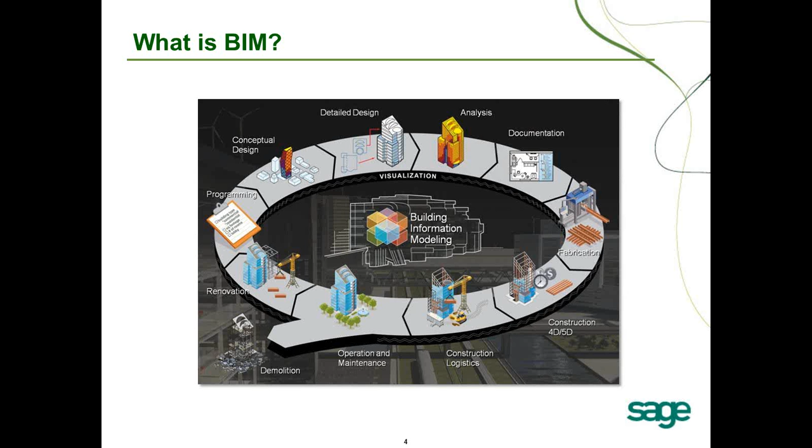And so that's this slide here. And by the way, the last slide that I'm going to show has all kinds of links, and Rob is more than welcome to send this out to everybody that attended today. So it's not just about Sage Timberline, there's all kinds of information you can go into with website links like Synchro or Navis and so forth. So that's what this slide talks about.

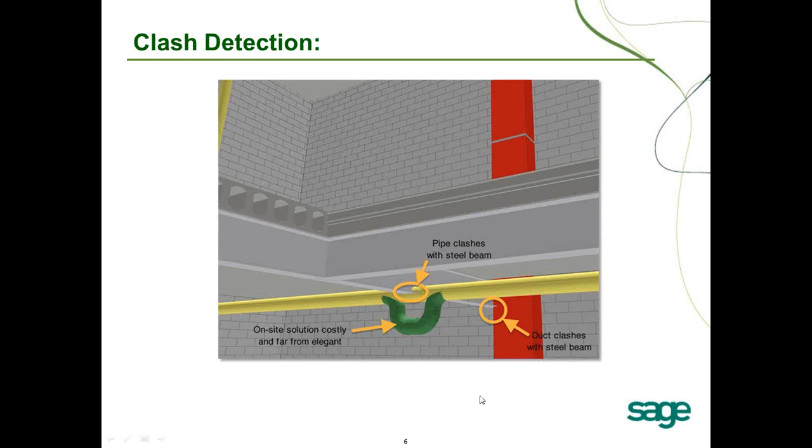Here's a couple slides. You have energy analysis as an example, clash detection here, where it's showing different scenarios, where you have to rerun the pipe where you've got a conflict. This is the application Synchro, which ties your Primavera, as I mentioned, to your model objects, and you're able to see your project being built in front of you. And again, with this application, if you put some cost to it, you can actually cash flow visually.

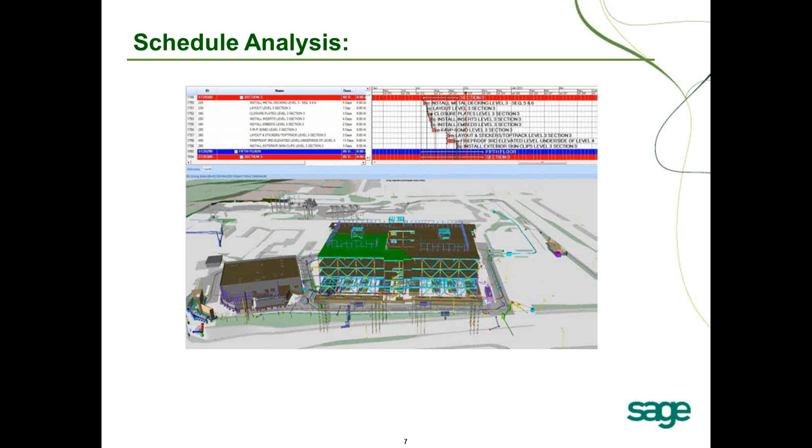And so that's kind of the basics of what is BIM.

Now, as we dive into how Sage Estimating or Timberline Estimating leverages from this, before I go into the BIM applications that drive our Sage Timberline spreadsheet, I'm actually going to talk a little bit about the core estimating and show a couple things within the core so you get an appreciation.

The way we work with BIM technology really mirrors the way our estimating application is set up. What I mean is Sage Timberline is a database spreadsheet application, and that database starts out as a book of information. You might have some pricing in there, the cost of a door. You might have an assembly that says I want all the pieces and parts that make up that wall, from the drywall to the metal studs to the insulation and paint. We have tools in there that also allow you to say how big, how tall, how many stories is this building, and as we answer those questions, it drives all that.

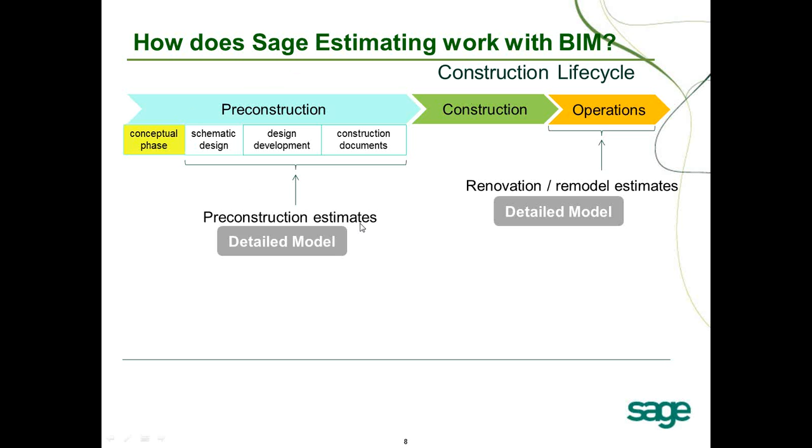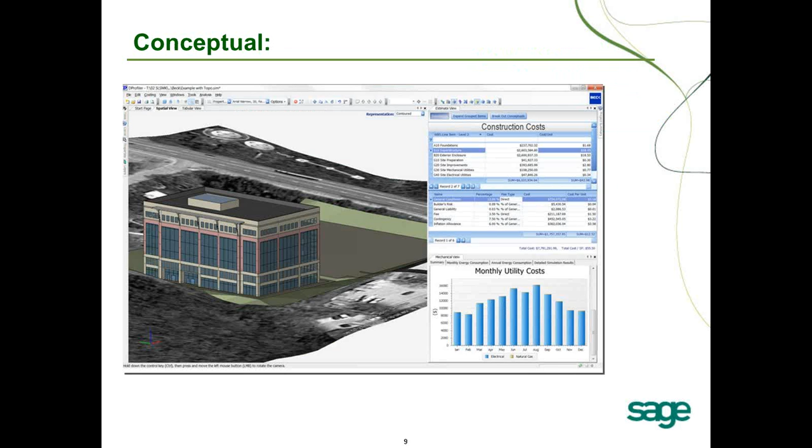So when you look at this area here in these four segments, that really is how we work within the core estimating application regardless of BIM technology. There's a slide of the dProfiler application I'm going to show here in a minute, and a slide of the Innovaya, which is working more with the detailed Revit information.

And people ask, what's the benefits? I've had the luxury and kind of got lucky here on some of these consulting jobs where I've been able to dive in and work with the BIM technology.

I think the biggest thing here is it gives companies another tool to utilize. Like the project I was on, it didn't stop us from looking at the drawings and being able to put in some other things to supplement, because BIM is a lot like a set of drawings. It's not necessarily going to be everything that's being designed in there, but you can certainly leverage from the good things that are in the Revit model.

On the project I was on, we had some really good information on structural and a lot of good things on a lot of the architectural trades, and we were able to leverage from that. But I think the biggest thing I'm finding out there is that it's really forging a great relationship with the architects, where you're really trying to communicate back.

And I've got a customer of mine that said they've taken the process from 2 weeks to produce a set of drawings down to 3 days.

And really what it's also done is, as I mentioned, it's forged that relationship with the architect. The architect, when they move on to another project, maybe a similar product, they want to be able to continue to work with them, almost creates that design-build relationship, working directly with that architect. It's kind of their job to lose, so to speak. So we're finding a lot of that going on.

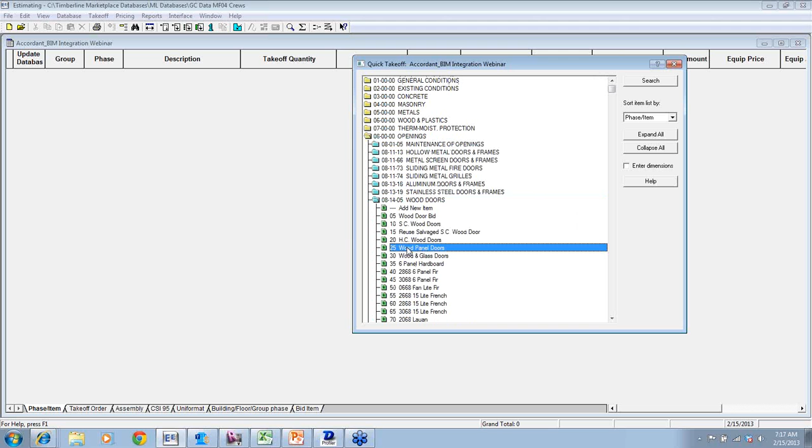So I use the door example. If I go into openings and go down to wood doors and I want to say a wood panel door, I can just drag that in. Again, I'm not doing anything with BIM right now. I just want you to get the understanding that it all starts out with kind of a book of information.

This database is completely definable, modifiable, unlimited in length. I've got a customer of mine that has over 1 million lines in their database. Not saying that's going to be your database, but the concept here is being able to build this book the way a company wants. It could be built on CSI 95, could be on 2004 Uniformat, or completely customizable.

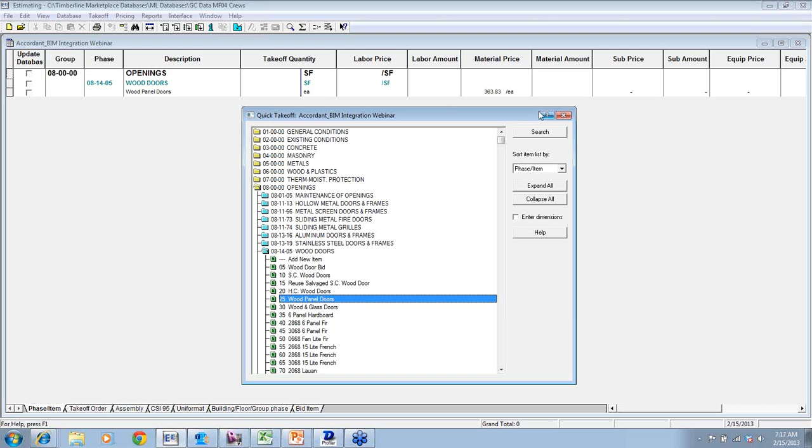The whole concept is as I drag stuff in, we can quantify things, and if you go over here and say, I disagree with that price, I want to make that $700, or make this $1,500, it back calculates. I can override things, and again, I'm working in a database spreadsheet concept.

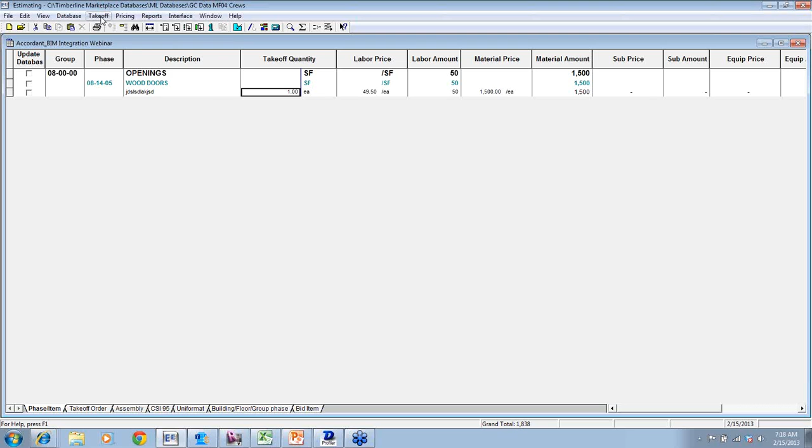Now, I mentioned to you earlier there's different ways to get information out of the database and into the spreadsheet. They're just roads that drive the spreadsheet, and if you look here in between these lines, there's different ways to pull that data and drive the spreadsheet. We have items, assemblies, and models.

So if you look at the assembly, let's say we're dealing with an assembly like a wall, or even a door assembly could be things. So if I go in here to a wall and I open this up, you see there's questions here. Again, everything you're seeing is definable, modifiable, unlimited length.

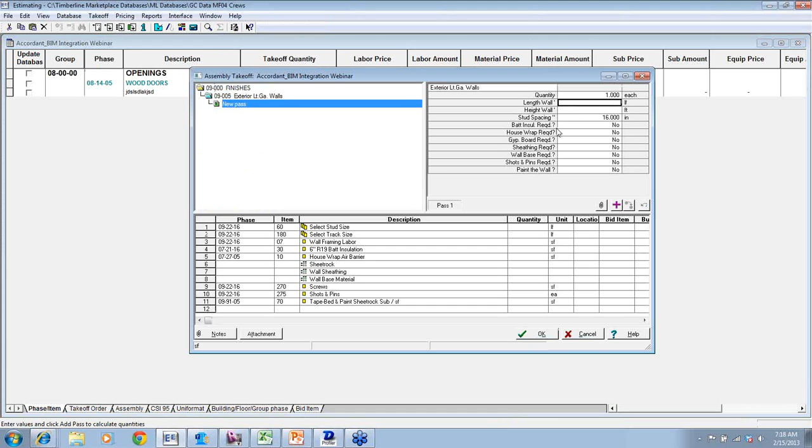So if I said, hey, this is 700 feet, maybe the height of the wall is 12, I have questions here, batt insulation, you're going to have chipboard required, and you'll notice as I answer these questions, it intelligently rolls out other things here that I might want. So if I said, hey, make that 10, 2 layers of rock, the chipboard is fine, I'm going to paint the wall.

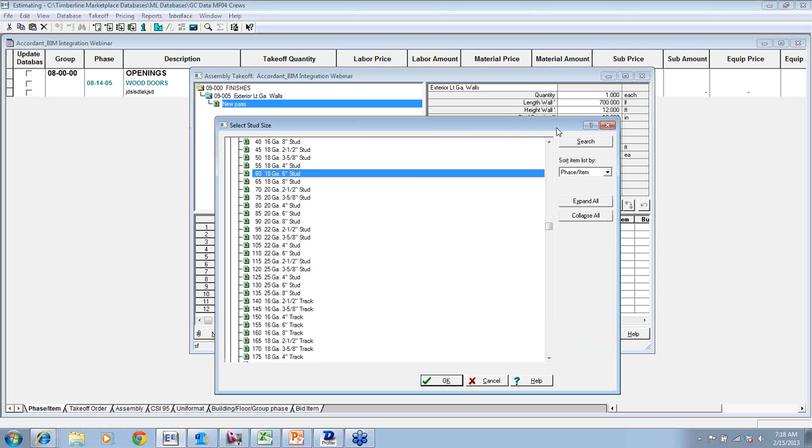I also can attach pictures that help me understand what that is. And again, just giving you the basics of what's inside our core estimating application. And again, I didn't have to go to the database here. These are all the items that are inside the database, but instead of dragging them line by line, as I answer these questions, it drives all that information. When I hit OK, it drives the spreadsheet.

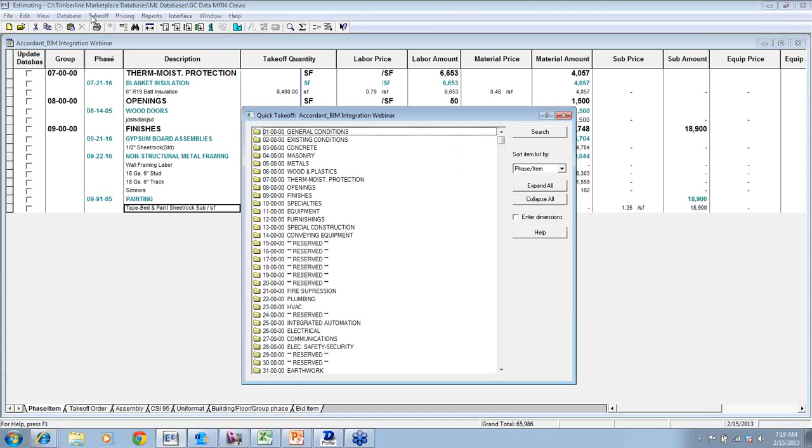Revit works and feeds off the details. So that's where you start talking about the likes of Autodesk QTO, Innovaya, Assemble, others coming that feed off that Revit information. The conceptual phase of it, when I say mirroring estimating, is really more of our cost modeling. And the cost modeling is saying, hey, I don't have a set of detailed drawings and documents or specifications.

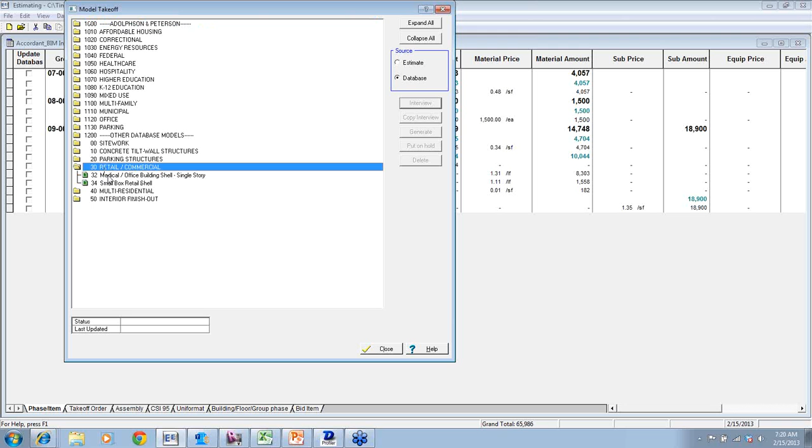I want to be able to come in here and as I open up that box retail, for example, maybe I say this is building A. I want to attach some pictures here and kind of go down a list of questions. I'm not dealing with footing schedules and wall schedules and that kind of information and the different door types that are out there. I'm answering merely, hey, this is a 50,000 square foot building. Don't hold me to these values. I'm just typing in some stuff.

But you get the idea is that I fill things in here. And as I fill out this information here, now what it does is it drives all the pieces and parts. And again, this is our cost modeling. And the reason I'm bringing this stuff up to you is, like I was saying earlier, is that it really mirrors the way we work with the Revit or the BIM world, if you will. In this case here, this really kind of mirrors how we work with dProfiler.

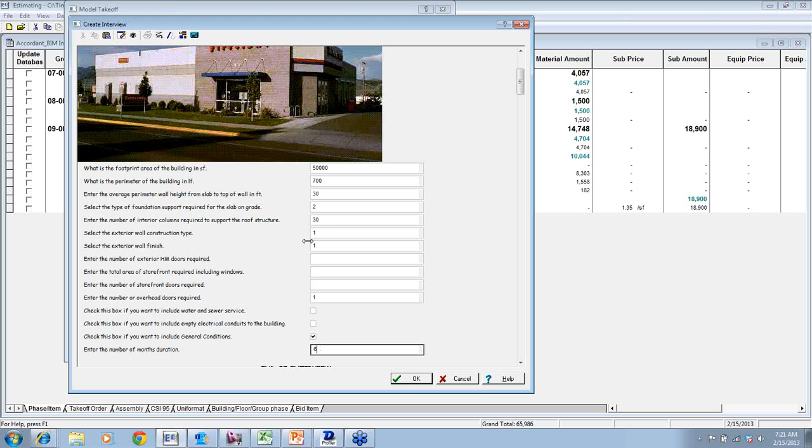And if I hit OK here, it just goes off and generates a cost estimate at a high level. So in this case here, I didn't have to go to the database and drag all this stuff in. It drove all that for me. So just some basics about this. So now, if you kind of understand our database spreadsheet concept within the walls of the core program, then we start venturing out into these different platforms. And as it relates to BIM, which is obviously today's topic, there's other things we can talk about today too.

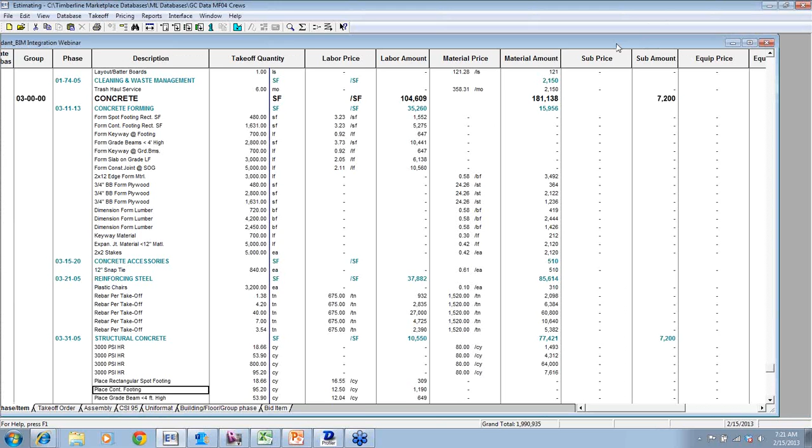But if I close this out for a second, this is where we start getting into, well, how does BIM relate to estimating? So if you understand that, all we're doing now is we're taking our database information and making it available into these different BIM platforms, okay?

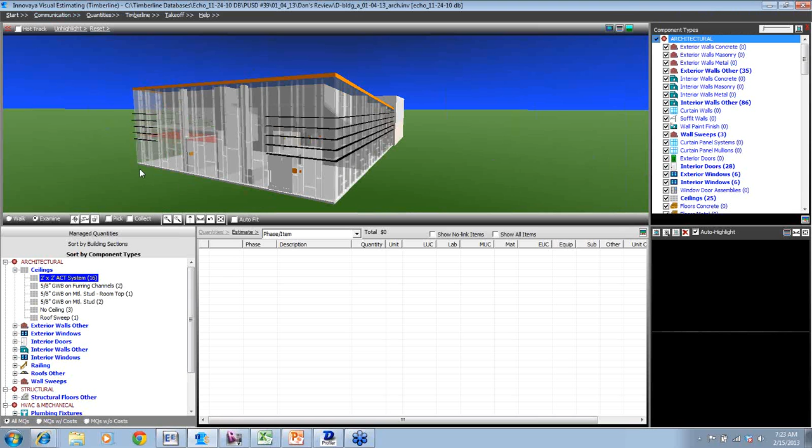If I wanted to go down here and say, let's turn off the exterior windows, I can dive in and out. And at any time, as I'm working with this, I can go up here to communication and just take a snapshot. In addition to that, as we're taking the stuff out of the Revit model, and I want to be able to communicate changes, there's an ability to go in here and say, show the design stage status. And as I do that, you can see instantly in 3D what's physically changed.

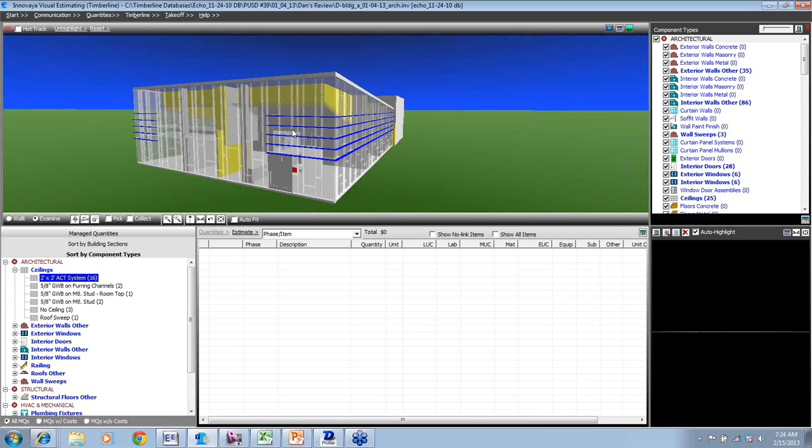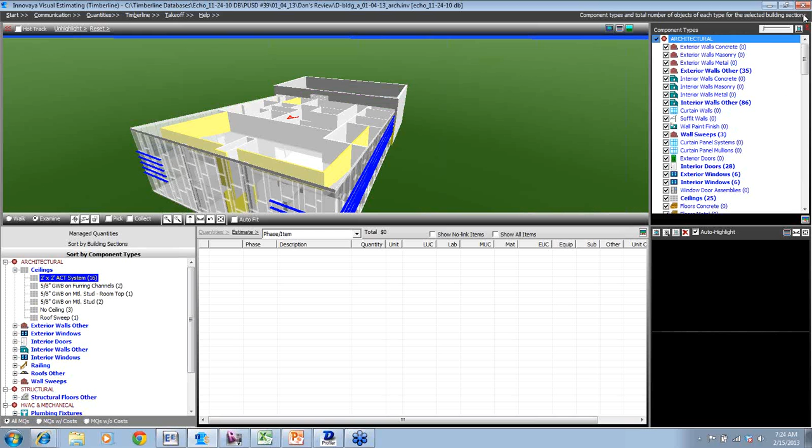So again, we would go in here and look at this information and say, I want to take a snapshot of that and send it out into Excel or Word and explain to the architect what's going on with all this stuff. A lot of times people would ask me, hey, can you show me the wall types? Well, if you look here, this is the ability to turn things on or off. And this is working with what they call the Revit components, which is kind of a standard library. And if you look over here, this kind of mirrors almost a set of drawings.

If you look here, there's architectural, there's structural, and so forth. But now what you look at here is kind of a standard library of components. And then underneath that, you'll notice here are the details of those components. So if I was to go in, for example, to interior walls, you'll see that all the walls are highlighted. If I open this up, you'll notice that it shows the object of all those walls.

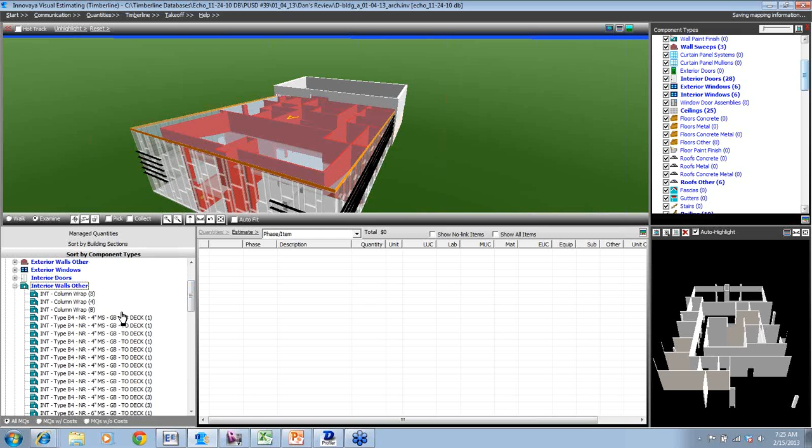And again, I talk about communication. I come over here and say take a snapshot. So if I come over here, these are all the different wall types that are available inside this building. If I went in here and clicked on one of these, you'll see that it highlights those specific walls. It shows you what that wall looks like. So again, we're still dealing with the communication side of things.

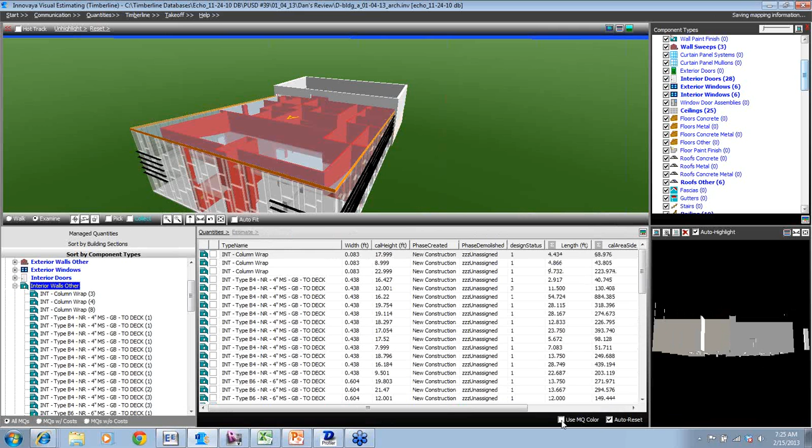And the other thing that we would do a lot of is visually see in a color-coded way all the different wall types and then be able to publish that out so people can communicate. So if I clicked on this here and you see all the list of the quantities, I can actually do this thing called use MQ color. And if I go in here and say color, I can just go right down the list, and it shows physically all the different wall types, all color-coded, and I can print out an image legend of what those are, and quickly be able to show the different types of walls out there and their information.

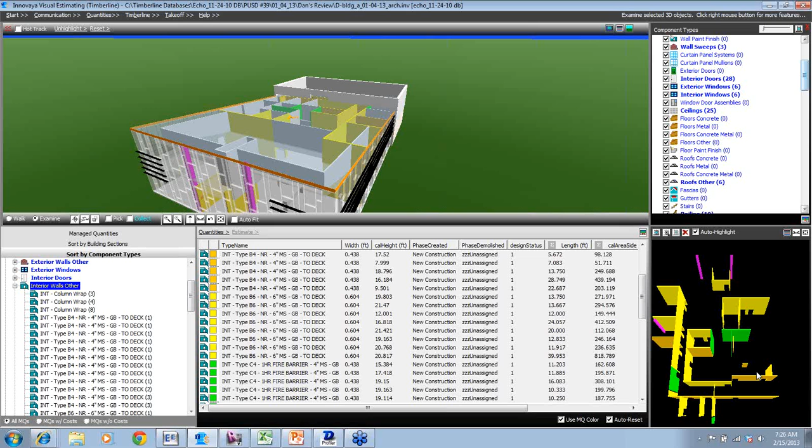And again, you'll notice as I was scanning through that, it's actually building this information over here. So as you look at this application from a communication standpoint, being able to dive into the model, understand what the model's doing, color code things and show design change status, there's a lot we can get out of this regardless of connecting it to the database. Now, as we learn the model, we have the ability to start connecting that Timberline database.

If you look here, see where it says Timberline? I've already created an estimate here, but you see where it says takeoff. Remember the quick takeoff, assembly takeoff and model? Those are the different ways I was talking about a moment ago back in the core estimating. So, for example, if I was to open up this assembly, now the database, which is what you're seeing over here, is available to me inside of BIM. And if I take a wall type, for example, and just drag it over, this is where the two worlds come together, where here's the information about that object.

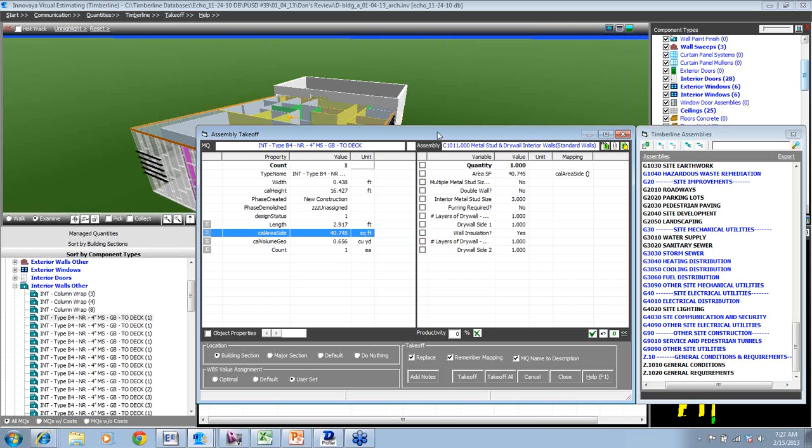One of the first things I said right at the beginning of the presentation is that Revit has the ability to have all this information that you can connect up to and use in different ways. In our way, we're able to take a lot of those attributes we want to work with, and we start training the model to work with our assemblies. Now, the reason this instantly came up is I've already trained it. But the concept is going into our library of assemblies, which you can organize however you want, and being able to just drag and drop things.

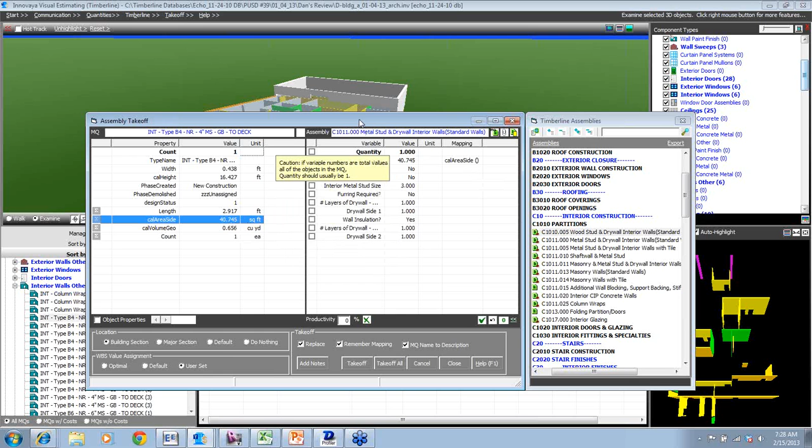And as I do that, that questionnaire that I was showing a minute ago back in the core estimating comes into BIM. So as I train the model, drag and drop things and answer questions, what it does now is as I accept that, hit check and say take off, I can also say take off all, and it'll go grab all of that wall type B4.

If I close this out for a second, you'll see that there's my Timberline estimate right inside of BIM. And I can look at it different ways. Some people like to look at it by more of a systems Uniformat approach. Other folks want to see it by assembly, and so forth. So the concept here is now I'm working in Revit, and I can instantly see my estimate as I'm doing that.

The beauty of this application, though, is that this is why a lot of these contractors, customers of mine, and including myself on the consulting side, have gone to this whole mode, because what they're doing is they're forging these relationships with these architects and getting these architects to really build the model in a way that the general contractor can extrapolate those quantities. Because once you've done this, it's burned into the database.

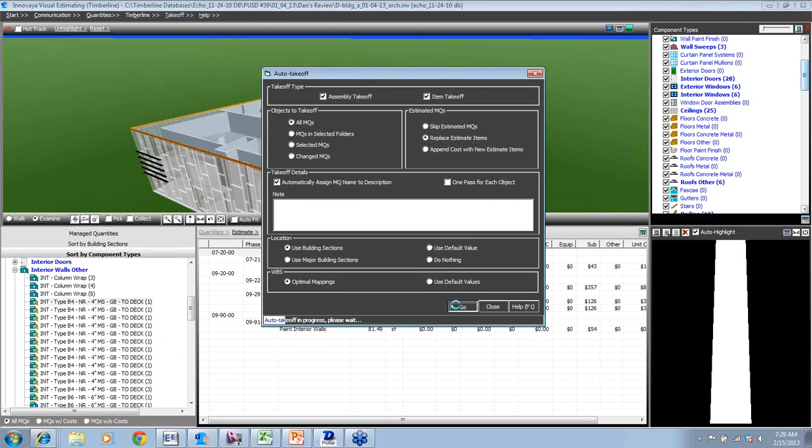So when I use the example of what used to take 2 weeks down to 3 days, the architect realizes the advantage of being able to connect that database in a quick fashion and be able to design in kind of a standard way. And if they can, all you're doing is connecting that database, because once you burn this information into the Timberline database, you can go right in here and say auto takeoff, and as you do that, you just say go get all the objects. And this is the example I was referencing, where I was able to take off 4,000 yards of concrete in a couple hours.

I trained the model on a previous set of drawings, and so you're really grabbing that information, generating that quickly, and then, if you see down here in the bottom left, MQs without cost. In this case, I still have a few things that maybe I don't even care about, but as I get new revised models, I just run the auto takeoff, and it knows all that. So the new stuff that's been added, I'm just working without costs here and connecting that.

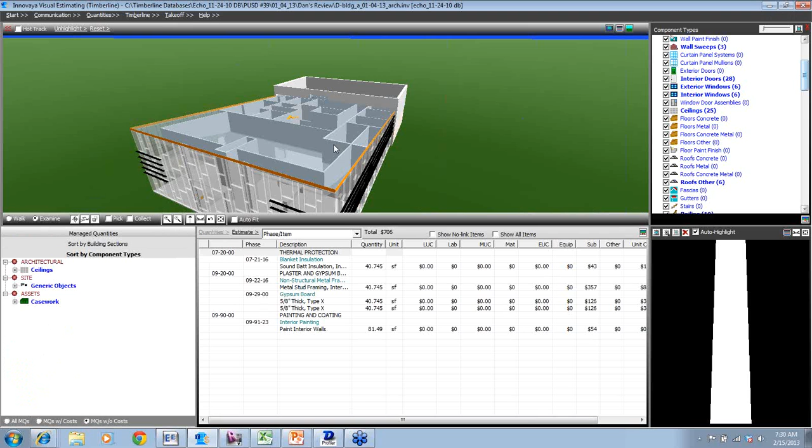So as I'm working in this, I can quickly and instantly generate those quantities and say, open estimate in Timberline. And when I do that, I talk about all roads kind of leading to the spreadsheet. You'll see in this case here, I hit OK. I didn't have to go through and drag all those items, and if you've noticed, it flips by uniformat, or if I go to the component type, this actually shows me exactly how I took off from the model, which is the communication from a visual standpoint I talked about.

Communication just inside the spreadsheet was huge for us too, because a lot of times you might work with the estimator, and he might say, I think that roof sweep is really going to be a metal ceiling, not something that's structural, or let's communicate back to the architect. And so, in addition to just giving them a CSI or uniformat breakdown, we can organize this exactly the way we took it off, so that it's easy to go back and understand, oh, this particular object, we connected this Timberline data to it. Do we need to make some revisions to it? Do we need to communicate back to the architect? Again, we talk about the communication and quickly quantifying things, and that application handles both.

And the QTO application is also working with the details. It's really reading more of a DWF file. So again, the whole concept with 3 of these applications we currently work with, Innovaya, QTO, and soon to be Assemble, is they're all working with the Revit information in a detailed fashion. So whatever is being programmed in there, we can leverage it and cost it out. So that's kind of the first phase of this stuff as it relates to BIM.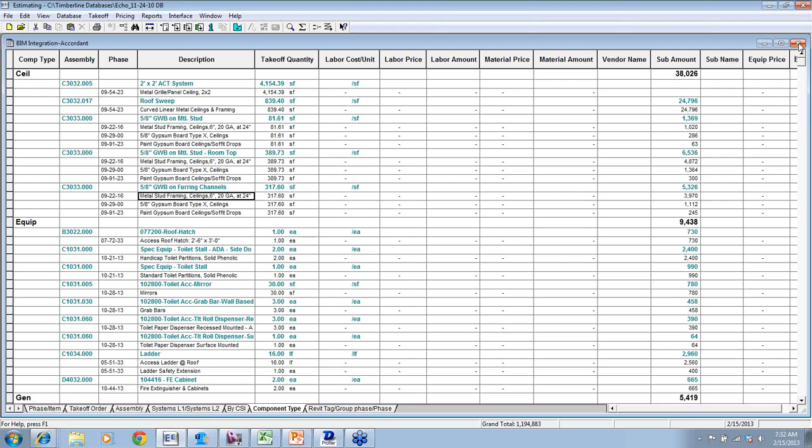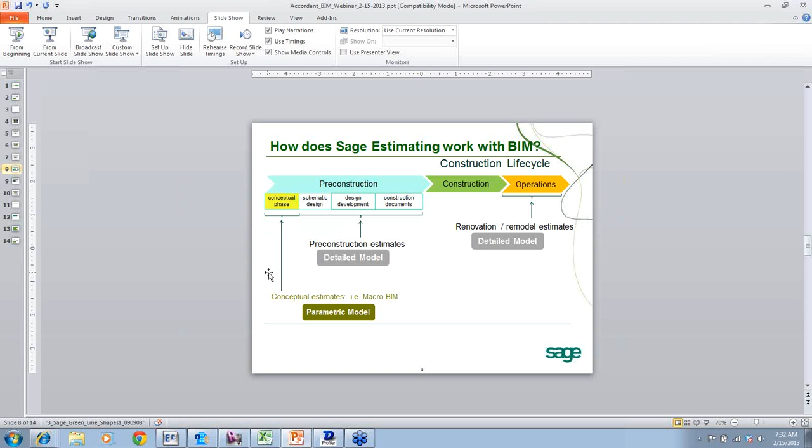Now, I go back to mirroring the roads of what we have in Sage Timberline, being able to say items, assemblies, and models. The cost modeling component, where I was answering how big, how tall, how many stories: if I go back to that PowerPoint slide and you see the conceptual phase here, that's that high-level design. So we work with another application from the BIM world called dProfiler, and it allows us to connect at a high level.

Hey, I don't have any drawings. I want to initially throw some things in here: how big, how tall, how many stories. And so if you look here, I'm in dProfiler, and if I say open new project, you'll notice I can enter some basics about the project.

I can put in a zip code, and if I put in a zip code, that'll give me the ability to also run an energy analysis. If you look here under building type, that could be a drop-down kind of mirroring the different kind of cost models you might have in estimating. But if I say office complex next, you'll see there's questions. And again, I'm using that example back in the core estimating, as this is kind of that high level.

How many floors? What's the floor-to-floor height? What's the parapet height? And as I'm filling out those kind of basics and high-level information, then I go to next. What's the shape of the building? Well, maybe we want to make this more of an L shape, and we're kind of visually putting this together. What's the spandrel height? And then I hit finish.

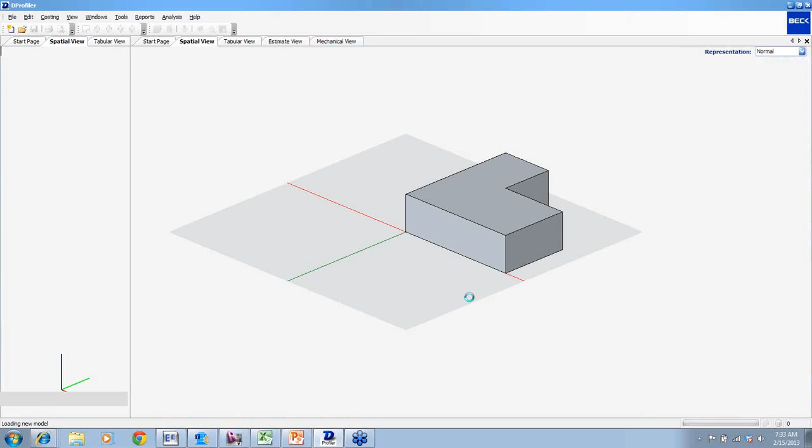And there's a lot. I'm not going to go too deep in this, but I just want to give you kind of the basics and figuring we can spend some time on answering some questions. But right now it gives me a box. Well, that box at this point, based on the parameters we gave it, can instantly generate a cost estimate. In addition to that, we can say, well, based on how we answered the questions, let's run maybe an energy analysis, and it'll go off again based on that zip code and run that information. And you'll see it'll give me kind of an average monthly utility cost.

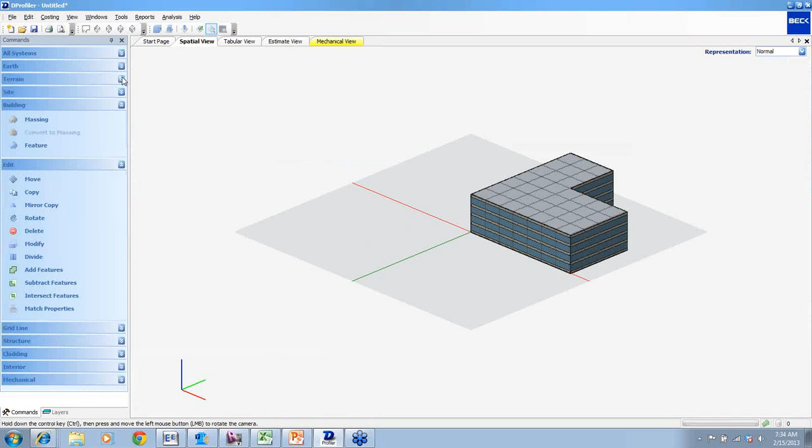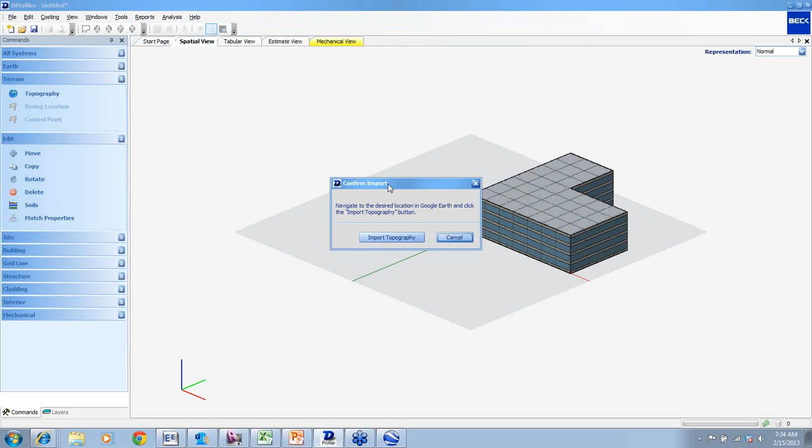If I go back into the spatial mode here, there's some other applications we can utilize. If I go into terrain, for example, I can launch Google Earth. Google Earth will open up. And I can come in here and type in an address, and it'll go find that address. I'm not sure about the delay that you might be getting, but if I go in here, move this up, I can move this down a little bit. So what I'm trying to do is find a plot of property off of Google Earth.

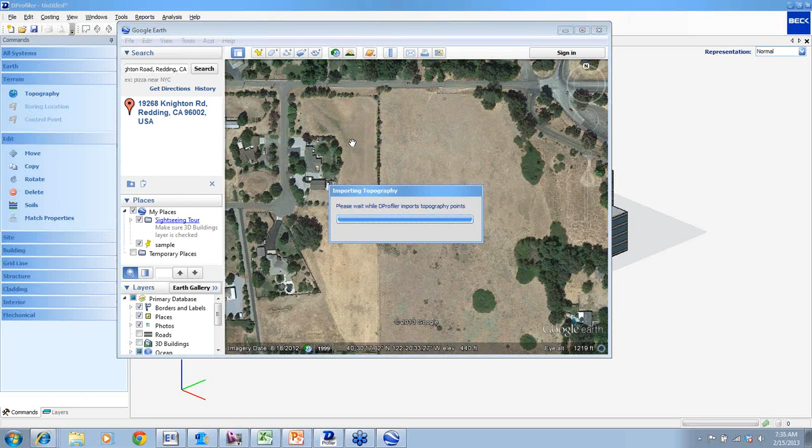You can bring in DWG files for 2D overlays, and if I want to zoom in a little more, I can say import topography. When I do that, it takes a picture of that, and it will drop it into DProfiler. And you'll see it over here in a second. But the whole concept with this is now I can move this, and I want to come into the building and I want to modify that. I want to move this. If you notice here, there's information on the structure, there's information on the site. I can put in a parking lot and things like that.

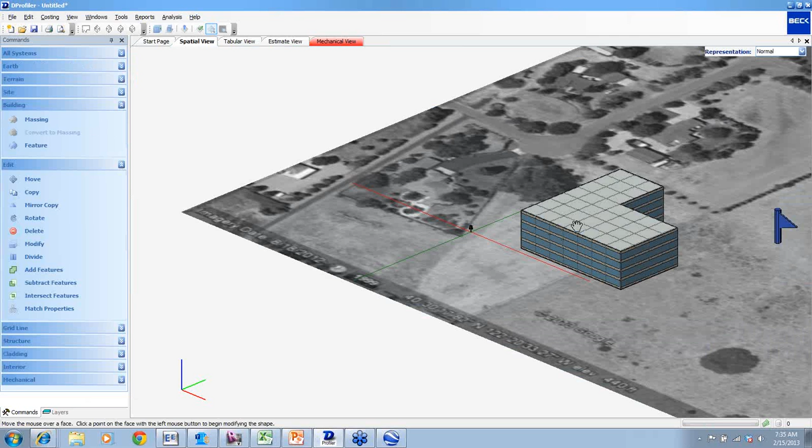But as I'm working with this model and I want to modify this, right now this is our estimate that I was showing, and this is coming directly from Timberline Estimating. If I come back here, you'll see there's the cost. If I go back into the spatial view and say, I really want to stretch this out, make it a little bigger, and again, I'm using that analogy of that cost modeling component over in estimating. How big, how tall, how many stories, stretch the building out, change things. And if I want to dynamically do that, tilt the building, move it around. If you notice in the estimate, that gives me a new number.

And if you look here, if I went into concrete, for example, you'll see that there's all this information that's being generated right from the Timberline database. Now, we're dynamically giving you costs, kind of like Innovaya was giving you costs right within BIM off the Revit model. Same concept here. As I make changes to that high-level design, it's instantly connected to the Timberline database and gives me a price.

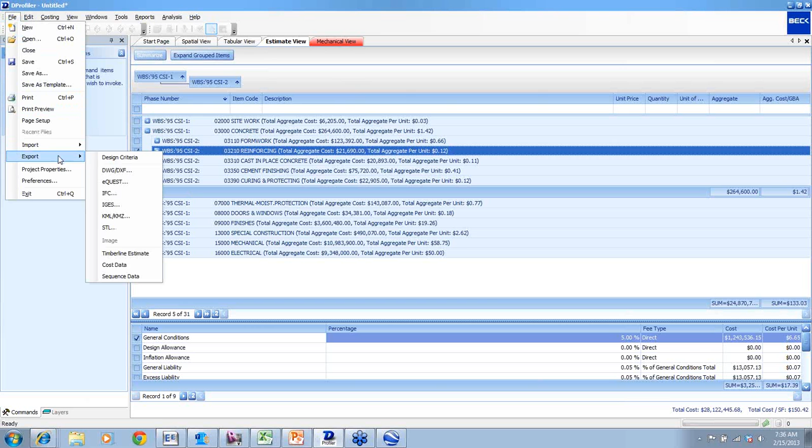Now, there might come a day where, okay, I'm at the point where I really want to publish this out, print some nice reports, work more with the Timberline estimate, and all I do at this point is say export to a Timberline estimate. And now I give it a name. Hit save.

And when I open this up, I just have to go to the directory, bear with me. There is my Timberline estimate, right down to the assemblies that were published, Uniformat.

So from the concept, the way we look at this is there's tools out there, and I focused on two today, and we have three, soon to be four, roads. There might be others, and our philosophy, as I mentioned earlier, about having the API and the software developers kit, we might be talking here next year and there might be twelve roads of them. The concept we're really trying to explore at corporate is how many different tools are out there that can help us drive that spreadsheet, which is why I initially took you to that core estimating and walked you through it within the walls.

And once you grasp that and we start moving it out, all we're doing is taking that Timberline database and training it to work in different BIM worlds. We could be in 2D worlds, we work with several applications in that capacity. Could be iPads downstream that we're going to be leveraging from. So I know the focus today is BIM, but that's really the concept there.

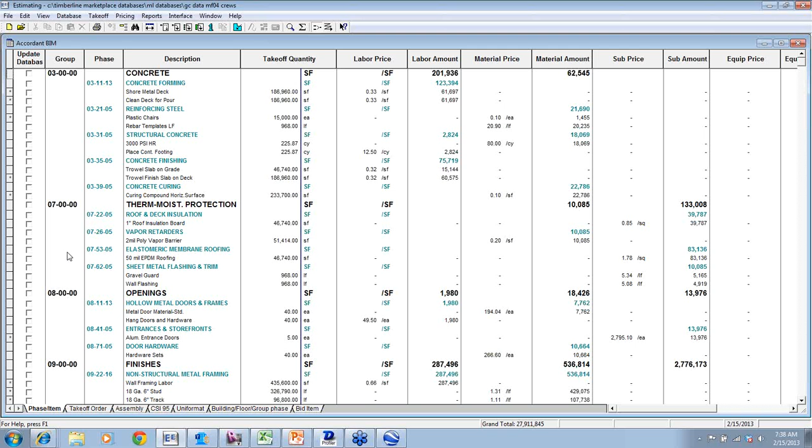No, I think you did a great job, and I'm glad that we have everybody muted because they're probably all out there just exclaiming that they can't believe that we can finally do this. So I can't wait to unmute this and hear what everybody has to say.

Okay, shall I unmute this? Hello, hello. I'm getting a lot of... Wow, this is tremendous, do you have the webinar coming out of your computer? Let's mute everybody. I have a telephone question, we're going to have to mute everybody. Trying to see who it is. That's better on my end. There we go, okay, are you there? Yes. Okay, do we have whoever that is, the perpetrator, muted?

I do, okay beautiful. We had one question typed in, they want to know what version of Timberline this is. Currently, the interfaces work with 9.7 and also 9.8. I'm using the 9.7 platform. There's not a lot of difference between 9.7 and 9.8, but they're both compliant. That's the question, I couldn't see it. Now maybe the file save as, so...

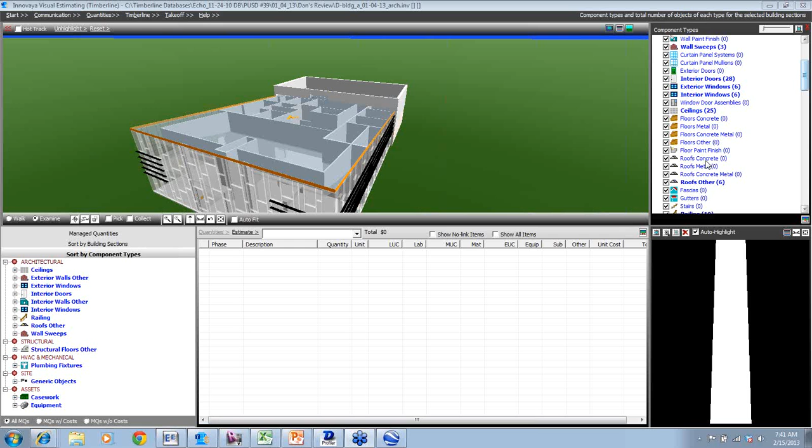No, I can see on the list that we have some Sage Timberline users and some that aren't Sage Timberline users, and I would like to maybe have one-on-one conversations with everyone. So does anybody mind if I give you a call?

Yeah, I'm wondering if anybody's out there listening to us at all. I hope so.

I think that would be your best bet at this point, there's, like you said Rob, people that have the estimating already and maybe they're looking at trying to connect up with some of this BIM stuff, and it might be a good time to interject, maybe looking at the folks' database and how we can set it up so it can work with these kinds of applications. Exactly, and on top of that, there might be folks that don't have estimating or any BIM information, and at least engage with them and see how we might be able to help them.